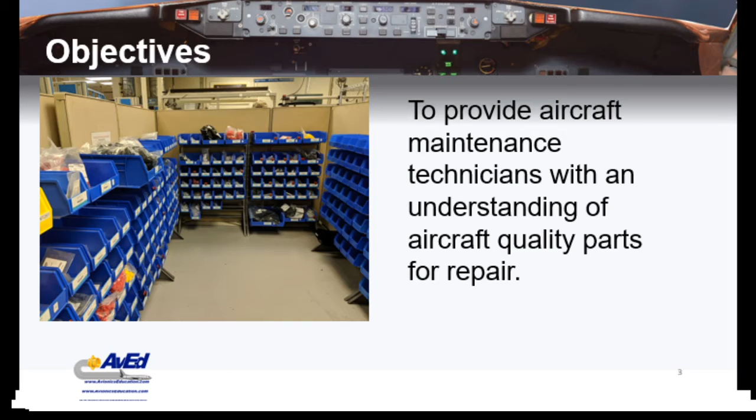So our objective for this presentation is to provide maintenance technicians with an understanding of what an aircraft quality part is to be used for repair. We're going to talk about some guidance that the FAA has put out to determine that, and more importantly, we're going to discuss the rules that understand it.

So first thing I'm going to do is that Part 43 is our maintenance rules. This is how we perform maintenance as technicians, whether you're a certificated repairman, an A&P mechanic, or somebody working under the supervision of a maintenance provider - could be a repair station, could be an airline.

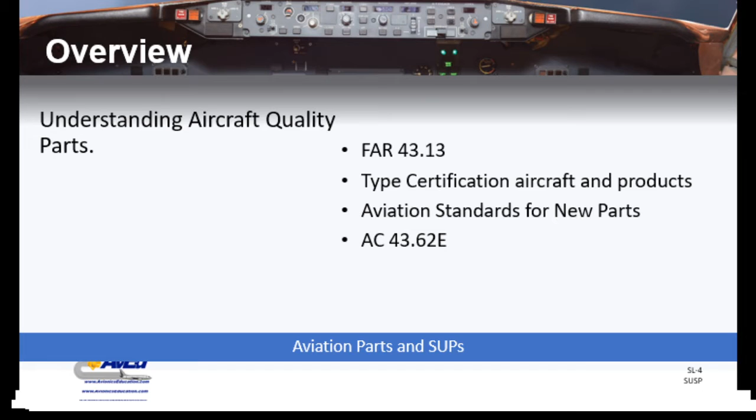We all have to comply with 43.13. We'll talk about that. I want to identify the difference between a non-type certificated aircraft product and those that are, so that we have a complete understanding of what we're hanging these parts onto. And then we'll get into what the FAA wants you as a technician to understand when installing a part on an aircraft. So we're going to talk about the guidance the FAA has put out, and the latest version is Advisory Circular 43-62 Echo. So let's hit right into it.

I'm going to go right to FAR 43. Here are the rules. Performance rules, general, little a. There's a lot here, but the first thing is: each person performing maintenance on an aircraft engine, propeller, or appliance shall use the methods, techniques, and practices, and more importantly, that person shall use the tools, equipment, and test apparatus necessary to assure completion of the work in accordance with accepted industry practices.

And then we get back to special equipment. Remember this phrase later on in the presentation, because we're going to come back to test apparatus necessary to complete the work - in other words, to determine the airworthiness of the product to be installed on the aircraft.

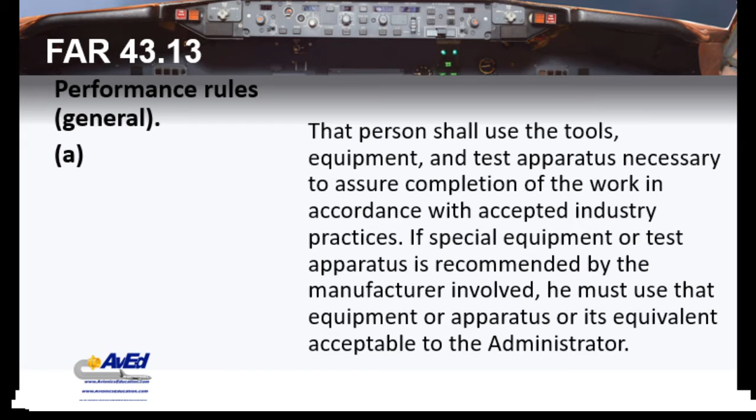Little b, again, talking about each person maintaining or altering an aviation product shall use - there's that word, if you've taken my FAR regulations course, words matter. Shall means imperative, you have to do it. Shall do that work in such a manner and use materials of such a quality that the condition of the airframe, aircraft, engine, propeller, or appliance worked on will be at least equal to its original or properly altered condition.

And it goes through all what they mean by properly altered condition. What this means in a nutshell is we must follow the information provided to us technicians on how to install a component and determine airworthiness. And these will all be based on the instructions for continuing airworthiness the manufacturer is going to provide for us when we perform maintenance on a type certificated product.

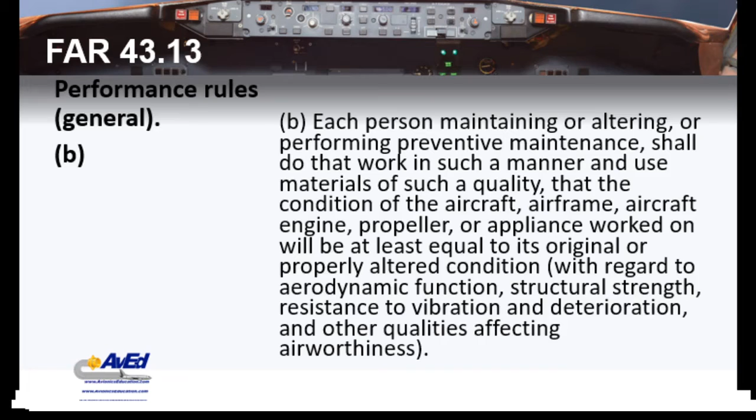Again, there's that word again. I want to emphasize little b: use materials of such quality. So how do we identify that? Meaning that we must use an approved part.

So an approved part is defined as something that's been properly designed, meaning that in the world of type certification products, our aircraft, that means Part 21; properly produced, which means manufactured, again under Part 21; then properly maintained, which means for us in maintenance, are we maintaining the product? Are we protecting it? Are we installing it correctly? And last and foremost, everything about anything we do in aviation, we must have documentation.

We have an old saying in the FAA: if it isn't written down, it never happened. And that is documentation. If you've seen one of my videos before on Ask an FAA Question, or on YouTube on the Avionics education channel, I did talk about serviceable tags and return to service documents. So that'd be a good one to go to if you need more information on what documentation is.

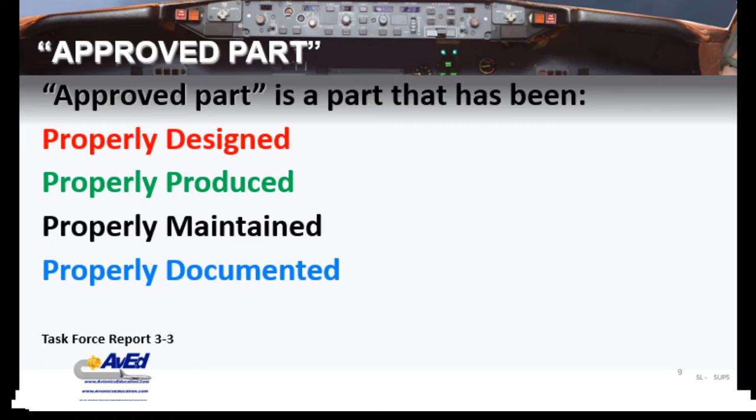But what could happen if everything breaks down? I'd like to discuss real briefly here some examples of where an aviation part did not meet any of the 4 criteria.

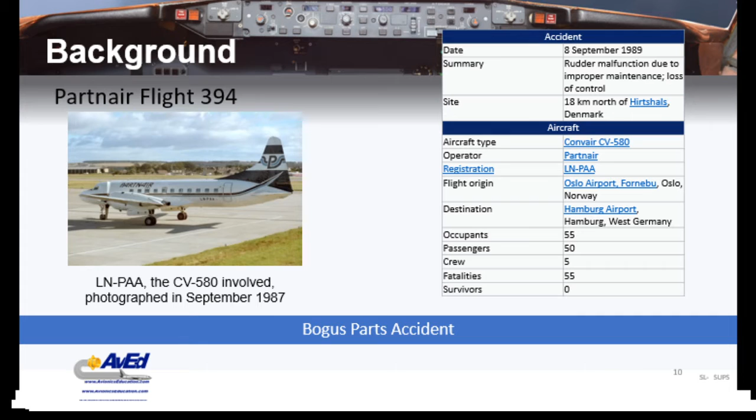And this was really the beginning, going back to - I believe it was, I'll pull it up here - 1989, where the Partnair aircraft, a Convair 580, which was the turboprop version, experienced a complete failure. In other words, we had an in-flight breakup of the aircraft.

The investigation showed, and here's the problem, there was no flight data recorder for it, that at the area of the breakup there was evidence of aerodynamic flutter, which you could see in the aluminum skin, that the skin will overheat. Think about a hanger, remember the old-fashioned hangers, if you bend it back and forth numerous times it'll eventually fracture. Well, that's because it increases its heat internally.

They also found that the APU mount had broken, which aggravated the vibrations. And they also found that the rudder shroud doors were missing before the breakup, meaning that these shroud doors that cover where the bolts are that mount the rudder into position were missing before the aircraft broke apart. There was a flight data recording earlier which did show indication that the aircraft was experiencing vibrations, possibly due to flutter at the time.

And then looking back at maintenance records - when I investigate aircraft accidents, I look and see who worked on the aircraft - the record showed that a mechanic did change all 4 of the vertical rudder bolts. For me, as an aircraft mechanic, that is what I would call unusual. It's not something you change all the time. So I would definitely be looking at that as an investigator.

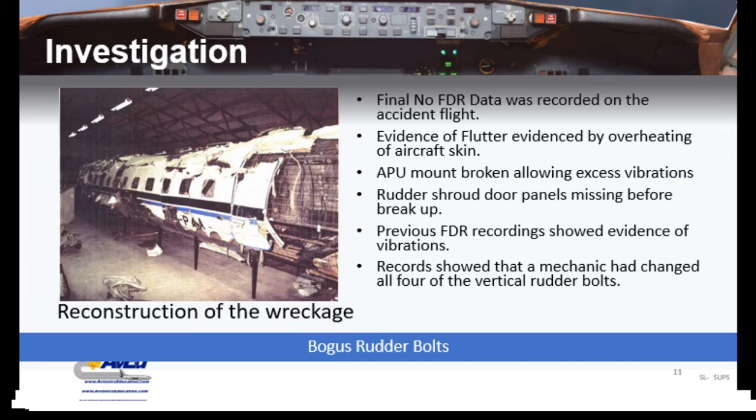Well, what did they find out? It was discovered through the investigation that the 4 bolts and the sleeves used to hold the rudder into position on the aircraft were counterfeited, meaning that they weren't treated, therefore would not remain torqued - which means they were too soft. And what aggravated the situation is you had the APU mount that was broken, which allowed vibration in the back of the aircraft to set up these harmonics.

So no one incident caused an accident, right? Now remember your accident investigation course when it talked about links in a chain.

So what did this lead to? We had an indication where we had a bogus part, an illegal part, or an unairworthy part introduced into the system. So the FAA went through and did an audit of aircraft manufacturers, airlines, certificated repair stations in the U.S.

Department of Transportation found that 39% of the parts on the shelf were found to be either counterfeit or otherwise what we define now as an unapproved part or a suspected unapproved part, meaning they didn't meet the 4 criteria: properly maintained, properly manufactured, properly designed, or more importantly, did it have its documentation? If you can't prove the documentation, the part was not done.

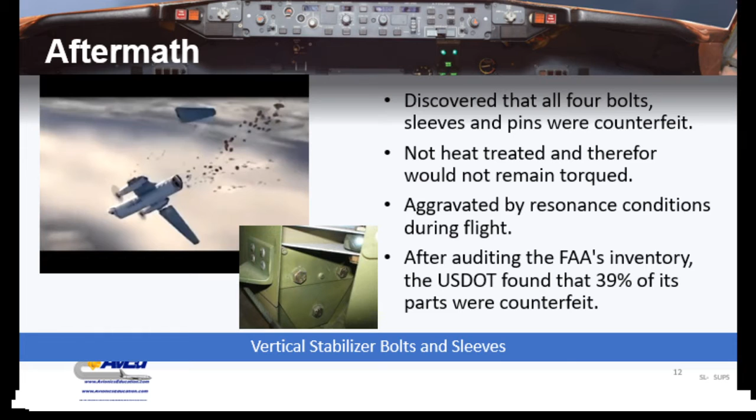Moving on. So moving forward today, and we're going back to 2010 right now, we'll talk about this in the SUPS course. I do have a SUPS course, a 2-hour version of this course that talks about suspected unapproved parts. But since 2010, there was an investigation by the NTSB looking at aviation parts that played a role in aircraft accidents, going back to 2010.

There were 24 cases that could be shown where an aircraft did have an unapproved part installed that was a factor leading to the accident. This is difficult to find, especially even today with accidents being really low, but also because a lot of the parts that fail in flight will disappear into the accident.

Now the FAA has recorded, just in the past 5 years, 135 unapproved parts discovered in passenger jets. If you pull up the most recent one, there was a whistleblower from China that tagged parts installed on Boeing 737 slat actuators that were definitely unapproved parts and posed a hazard to aviation and had to be removed from the system. So it's still happening today.

Why? Because aviation parts, to meet those 4 criteria I talked about before, necessarily makes them really expensive because of control, design, record keeping—all that goes with proving an aviation part means it costs money for technicians and manufacturers and aircraft manufacturers to track these parts.

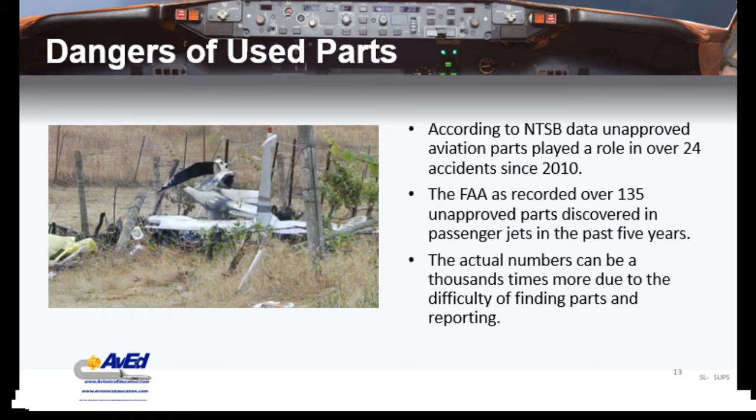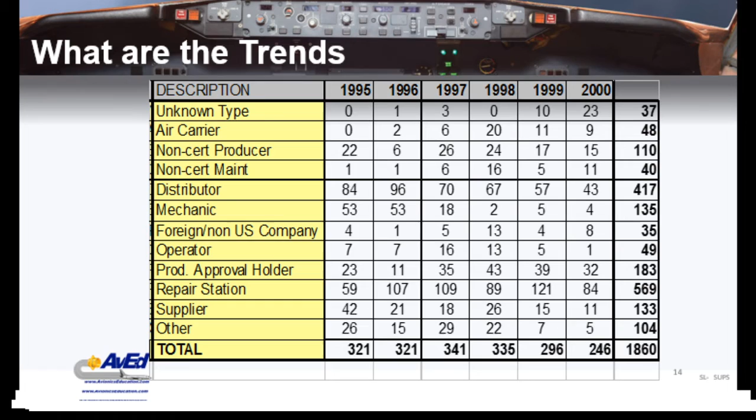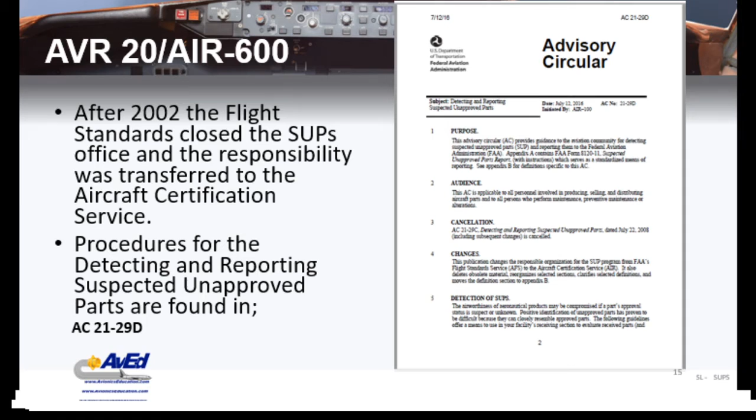So what does that really mean, Bruce? Well, it should have not gone to AIR 600. In my mind, in my opinion, just my opinion, because I'm not in the FAA, I can have an opinion, the AVR 20 should go back to flight standards because that is the people who are most likely to catch these parts being installed on an aircraft. And we'll talk about that in another section.

Okay, so since the AVR office, the Flight Standard Office, was closed, there has been a significant drop in the number of reports of SUPs, Suspected Unapproved Parts. Remember, when I was in the FAA, when the program was under flight standards, an example for me is I would actually get a notification through email, or other ways, to the FAA inspector, and I'd be notified through the SUPS process to go investigate an unapproved part for one of my operators, one of my air carriers that I was assigned principal for. We'd go look and see if these parts were in inventory and pull them out. We found, for one operator, generator shear shafts that connect the generators to the CSDs were bogus.

Another source of unapproved reporting to me was directly from an operator. I had an avionics operator who called me up - they were doing a repair, opened it up, and noticed the maintenance had been done out of country with a significant change to the battery system of an inertial reference unit, IRU. It turned out we had to do an investigation because this outside-the-US maintenance repair organization was not using approved data or approved processes. So it became very good then.

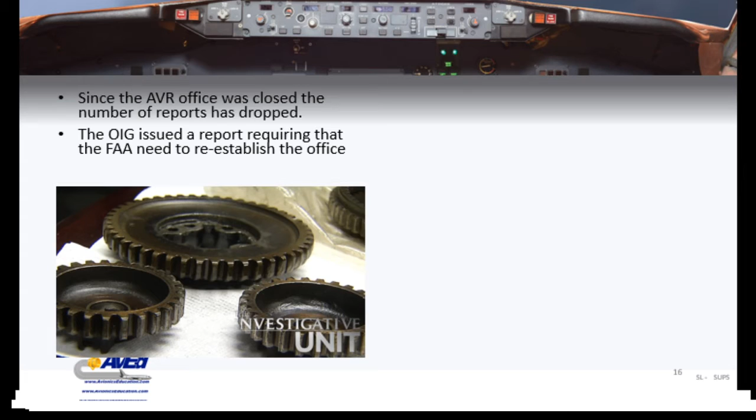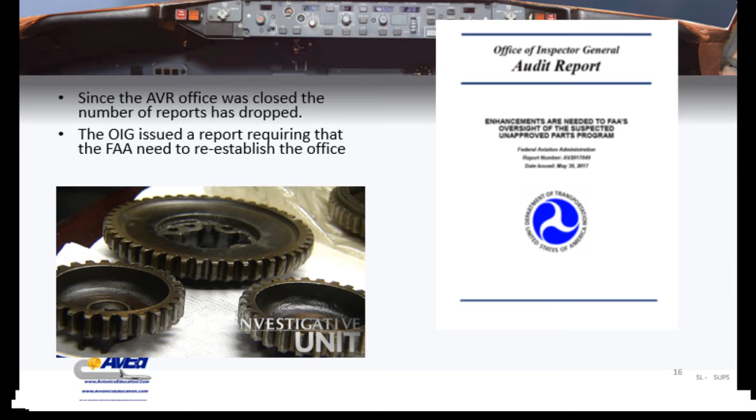Now, what happened since? Well, the OIG, the Office of Inspector General for the DOT, did issue an audit report. I'm going to put this on the link in the description page of this video later on when I redo the video. They were really critical of the FAA as a whole for not having an established system for reporting, or giving mechanics, technicians, and airlines an avenue to report SUPs. We'll talk about that later.

So then what? What are we supposed to do? Well, we're supposed to, as technicians, still operate, working on aircraft or maintaining aircraft in accordance with Part 43. So it's still our responsibility to determine that the parts we're using in the aircraft are appropriate and safe. Okay, two issues here: is it appropriate, and is it safe? The FAA did issue guidance to help us do that.

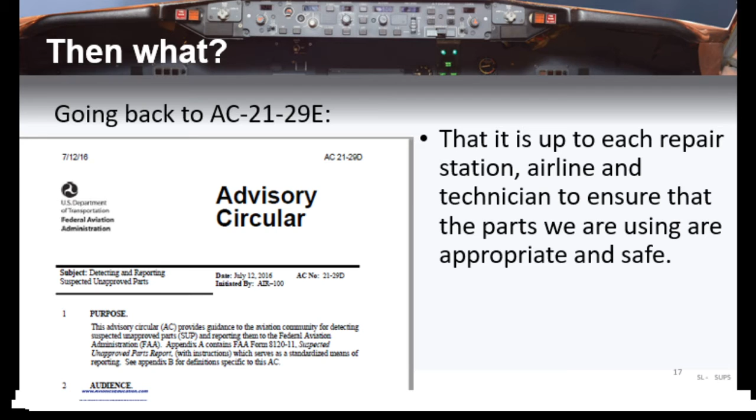We're going to talk about detecting and reporting suspected unapproved parts. But I also have another one that talks about identification of aircraft parts. So there are orders there. Right now, this order, if you go to the AC, will tell you to go to the hotline and file a complaint on the form. And so I'm confident that the FAA will step up and make improvements.

So let's talk about 43.1, applicability. This is getting back to that properly maintained element of a part. Just paraphrasing here real quick: except as provided in paragraphs B and D of this section - remember, these FARs always have exceptions, and these exceptions will cover other operators that have their own set of rules - this part describes rules governing the maintenance, preventive maintenance, rebuilding, and alteration of any of three things: aircraft having a U.S. airworthiness certificate, some foreign registered aircraft, and we'll talk about that in a second, or any airframe, aircraft engine, propeller, appliance, and component of such aircraft. So everything that meets an airworthiness standard has to be maintained in accordance with Part 43.1.

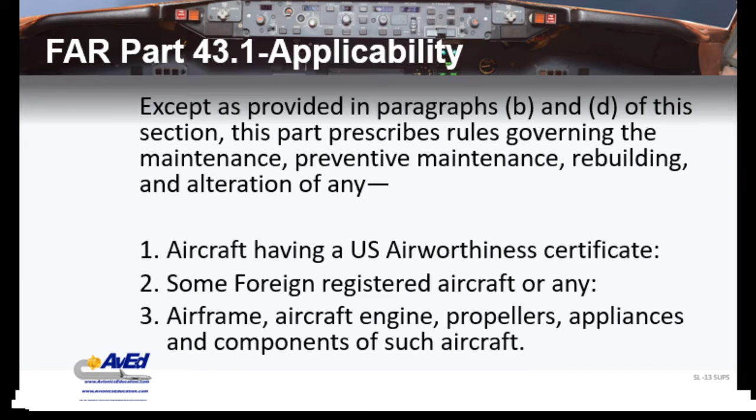So what does that mean? Well, let's talk about the first one. Aircraft operated in the United States under a TC type certification are issued at their inception a standard airworthiness certificate. Under the conditions of the certificate, unless sooner revoked or suspended, the aircraft must be maintained in an airworthy condition for the certificate to be valid.

So what's an airworthy condition? We always have to talk about that. The FAA has actually updated its definition, but it's both a verb and a noun in some sense. It's a condition of being and something that can be described.

First and foremost, it is something that meets its type design. In other words, everything on it the day it was born, when the aircraft was hauled out of the factory and issued the airworthiness certificate.

And then there's words, remember, my FAR class says, or in properly altered condition. What they mean by properly altered is that not every aircraft is going to be perfectly replicated throughout its entire life as the day it was issued its airworthiness certificate. It is modified over time, improved over time. These improvements or modifications must be properly done.

We're talking about STCs, ADs, airworthiness directives, supplemental type certifications, or other types of modification of the aircraft over the years. Did you know properly altered condition could also mean compliance with an MEL, minimum equipment list requirement?

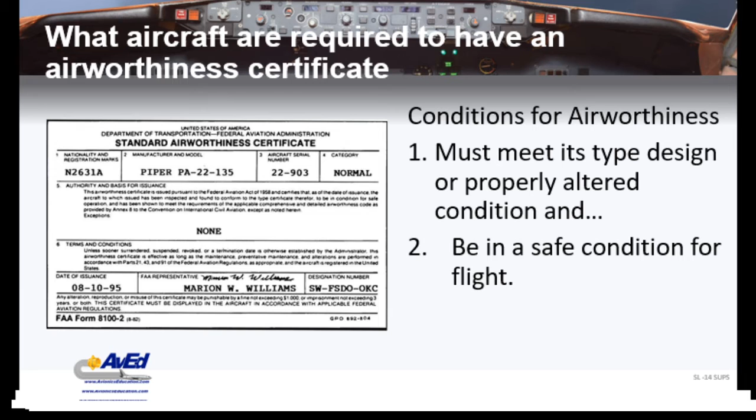The safe means, well, if I'm flying in daylight, in clear weather, then it's safe for me to have a landing light out. However, if the conditions of the weather are bad, or I'm at night in certain conditions, then even though the MEL says I can deactivate the equipment, it may not be safe for me to do so. That's what they mean by conditions for safe flight.

So let's talk about type design then. The conditions that an aircraft was issued its airworthiness certificate, under Subpart B in Part 21 - FAR Part 21 is manufacturing, issued by the FAA for type certification - are included as part of the type design.

We have all this information and records. I've got operating limitations for the aircraft, type certificate data sheet for the aircraft. It talks about all the parts and capabilities of the aircraft. Applicable regulations of the subchapter, which the FAA requires - we read that carefully - the applicable regulations of the subchapter with which the FAA records compliance.

What we're talking about there is that if I have an aircraft manufactured under Part 21, there's a different subchapter for a Part 23 general aviation aircraft versus a Part 25 air carrier aircraft. That's what they mean. And there's the old caveat: any other conditions or limitations prescribed for the product in this subchapter.

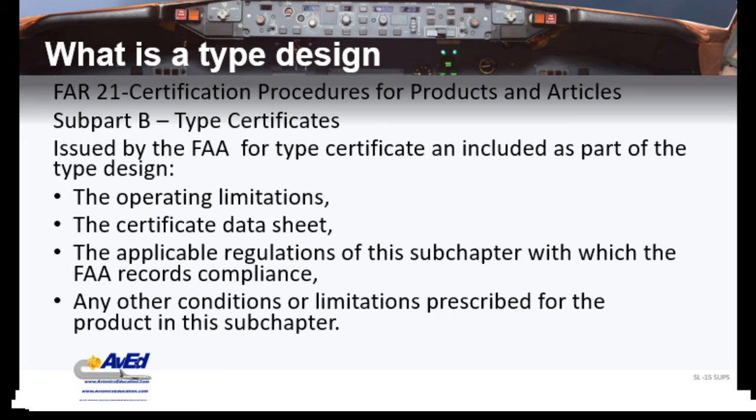So we're not going to get too much into that, but we're just talking about type certificates. What do they not include? Obviously, military aircraft. Military aircraft are made under their own military standards. Are they more or less strict than civil aviation? I would have to say no.

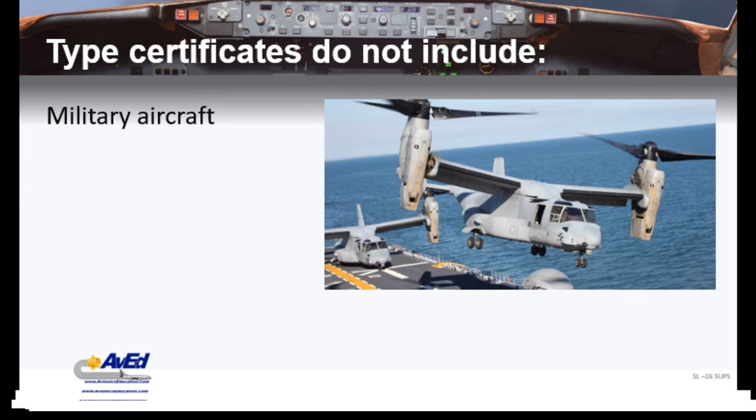But it's just another standard, another method of validation that we have to understand. I can't take a civil aviation part and mix it with a military aircraft unless the military specifications or maintenance structure says I can do so specifically.

Experimental aircraft - there's a bunch of different types of experimental aircraft out there. Amateur home built: I don't maintain that to Part 43. It doesn't apply to an amateur because it's not type certificated. Special use experimental aircraft show compliance; the manufacturers, under the conditions of the certificate, determine the safety of the operation.

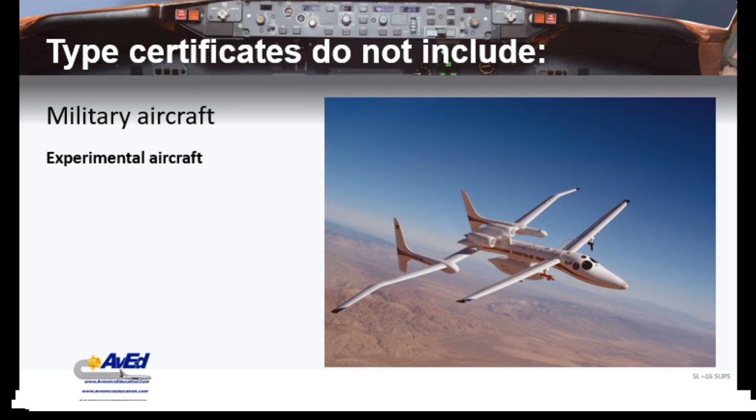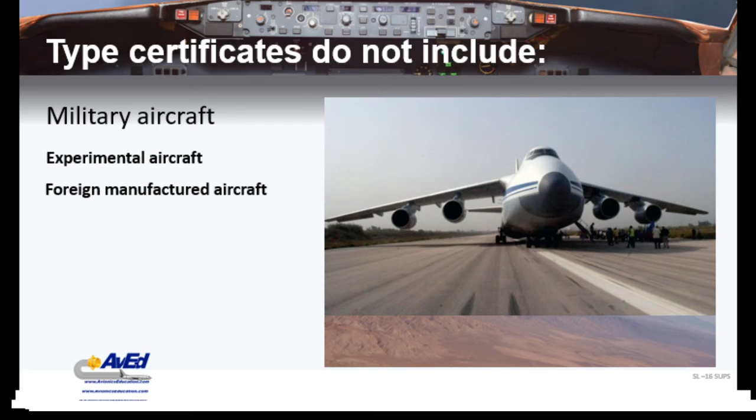And foreign manufactured aircraft - we operate in the United States. We allow a lot of aircraft that come into the United States that are foreign manufactured, meaning they're not U.S. N-registered, operating under an air carrier certificate. We don't maintain them in Part 43. They have their own standards.

So, aircraft with airworthiness certificates - just by name, Boeings, McDonnell Douglas, Bombardiers have airworthiness certificates. Cessna, Piper, any aircraft that is type certificated has that white certificate. And if anybody gets on an airplane and is standing by the door waiting to get on - which is not happening - but when you walk in, you should see the airworthiness certificate somewhere posted around the entrance to the door.

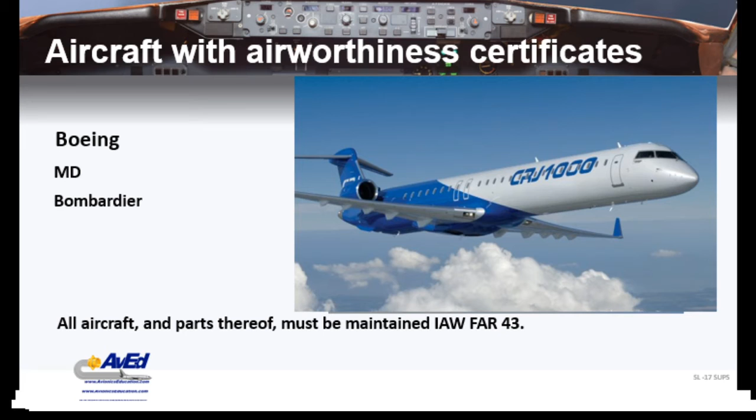Not only the aircraft manufacturer, but everything that goes on those aircraft must be maintained in accordance with Part 43.

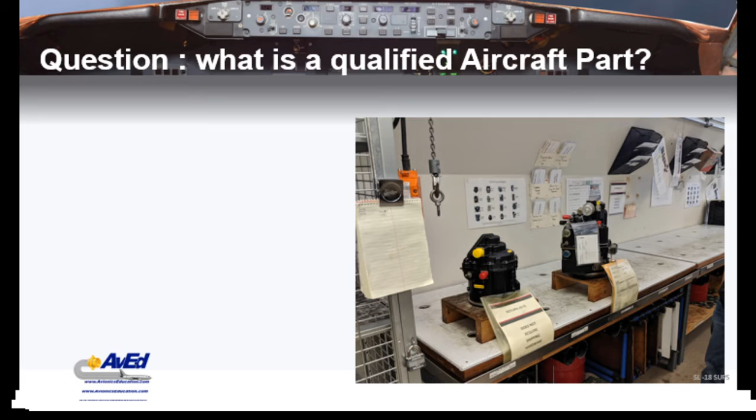So let's talk about the next part of the situation. What is a qualified aircraft part? Well, the answer is one that meets an FAA parts approval process.

That has a lot of definitions in aviation because there's a few different people that can produce parts for an aircraft. For example, a manufacturer can produce their parts for their own aircraft. So design approvals for anything, and we talk about aircraft products, by the way.

We'll get into this definition. A product is the aircraft itself, an aircraft engine, or a propeller. These are aircraft products.

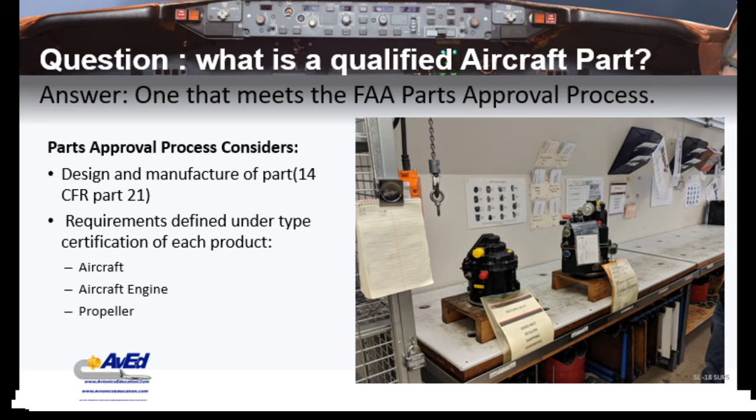A part is eligible for installation in a type certificated product because we get back into, is it approved design? Has it been produced properly? And does it come with proper documentation? This is for new parts, not repaired parts, so we're all complying with Part 21 here.

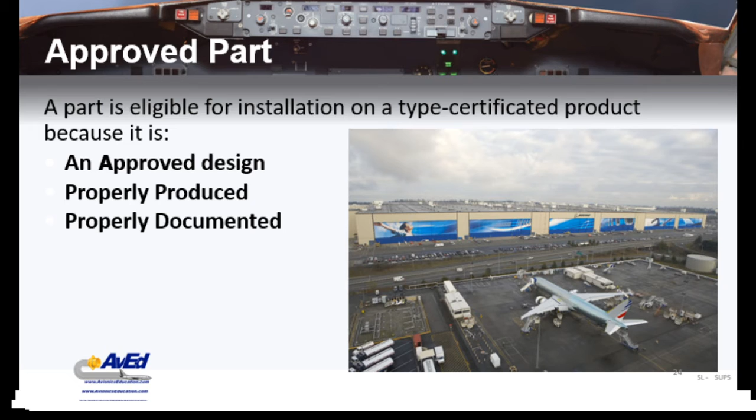Part of that approved design, these are things that have to be produced to it being an approved design, which means I need to have drawings, specifications, showing the configuration, and that means it may show the different approval levels or approval for what installation the part can be installed on. Must include detailed and written test procedures and the desired results.

In other words, if I have a test function for a pressure valve example, it wants to give the limitations. It must apply limitations to the technician certifying the part. At what point the valve opens? At what point does the valve close? That's what we're talking about, desired results.

And the last is, it must define the airworthiness limitations included in a list of next higher assemblies for an aircraft for which the part is designed. So that must be all part of the approved design.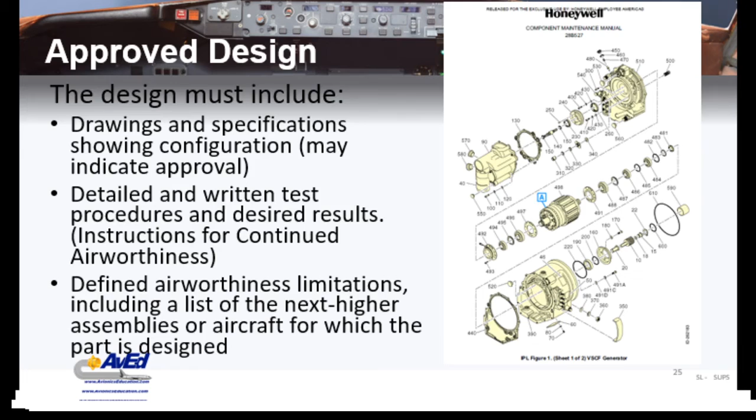The documents themselves, again, if it's manufactured by an aircraft, their document is going to be the type certificate sheet itself. I can approve aircraft parts based on an STC, which stands for Supplemental Type Certificate.

In other words, I want to make a widget for a Piper, for example. Then I can apply as an STC applicant, make the widget for the Piper, and then if I meet certain criteria, which is all the Part 21 criteria except for that one individual part on that one aircraft, the FAA will issue me an STC.

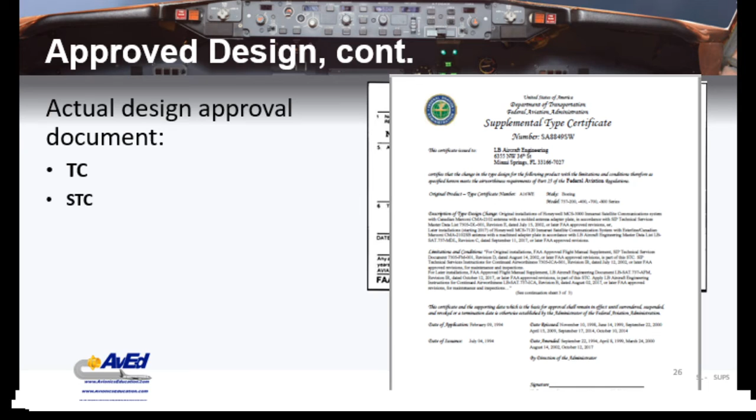Now, great, I can install it, but remember, there's something that has to go with it. If I want to sell the part, then I have to have a PMA, which stands for Parts Manufacturer Approval. So if I have an STC part and I want to manufacture it for sale, either on behalf of the TC holder or an STC holder, I must have a PMA approval to manufacture that part from the FAA. And Part 21 goes with all of that.

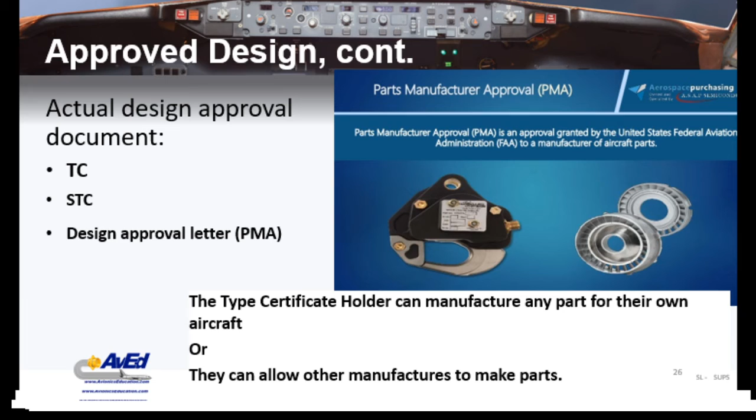So, a type certificate holder can manufacture any part for their own aircraft, or they can allow other manufacturers to make those parts, provided that they have a PMA letter from the FAA saying they can do that.

So, how do we determine what parts can go on an aircraft? We're looking for an approved parts list. And this comes, again, in many various forms.

For general aviation, when I went to A&P school, or when I taught in A&P school, the one that we went into the most was the Type Certificated Data Sheet, the TC Data Sheet. The TC Data Sheet provides information about the dimensions, what engines can be installed, what autopilots can be installed, the motion of the flight controls. It gives all the vital data for that aircraft to identify that as that aircraft.

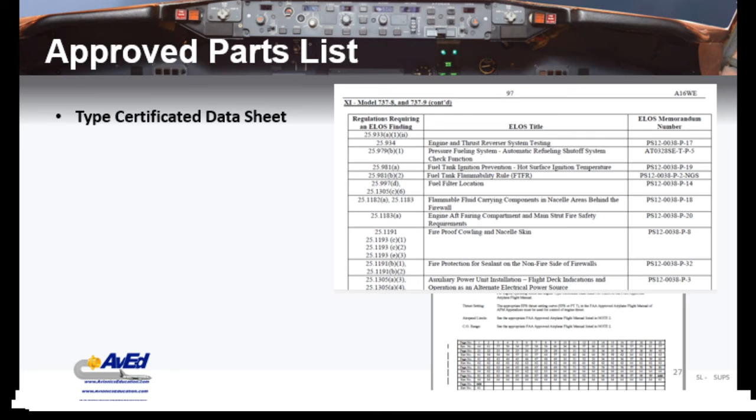There's an example here showing some of the equipment that could be installed by make, model, series, part number. Another item that will actually help a technician determine if a part is legal is the aircraft's approved equipment list. Now, if it's not shown on the type certificated data sheet, the aircraft approved equipment list will show what is in the aircraft now and possibly what is an option.

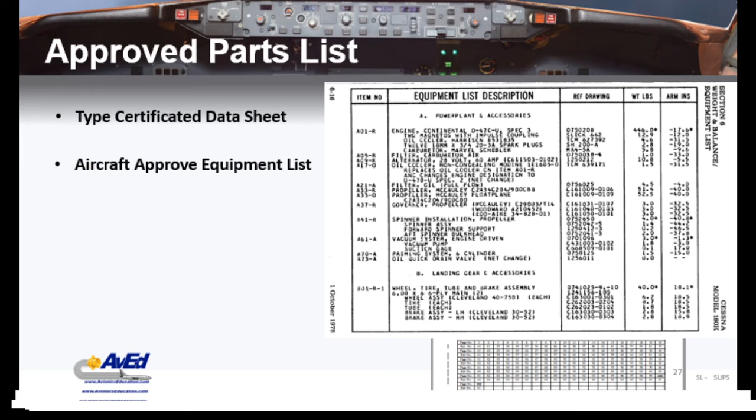And the type certificate data sheet could show an autopilot make and model, but maybe at a later date that autopilot was modified to a newer unit, which means the installer had to add to the aircraft's approved equipment list the new autopilot being installed, because it was installed using proper parts with proper data, using proper tools and equipment to install and test it.

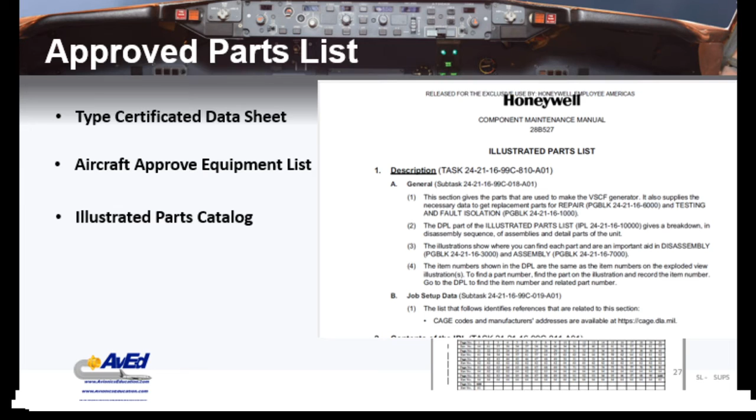If you have an illustrated parts catalog, an IPC, that will also show you what parts are eligible to be installed by component. IPCs themselves are not part of instructions for continued airworthiness, they're not maintenance instructions, but a lot of technicians use them as a tool that shows the orientation of certain parts as you install them. You certainly could use it to order parts from an approved vendor.

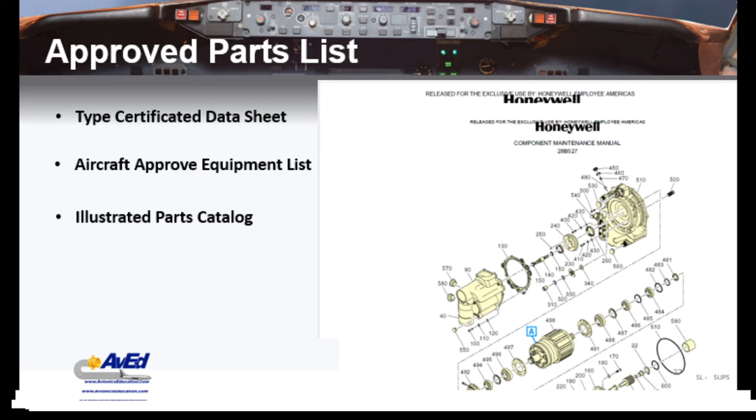Here's another example of a component maintenance manual, and it shows the part number and its various installations, and the figure numbers of where these parts are located.

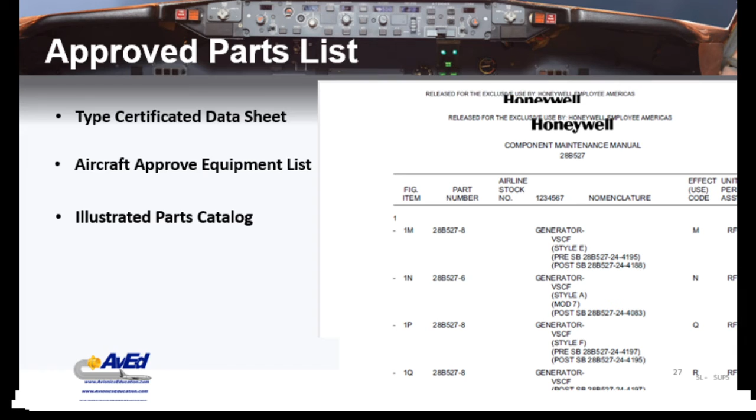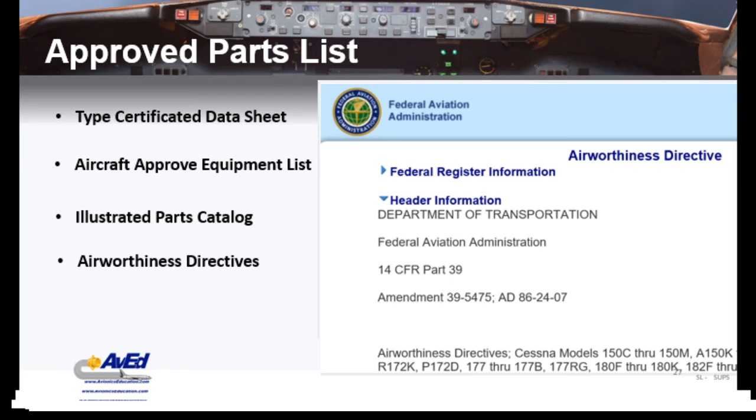Another source of approved data is the FAA issuing an airworthiness directive. Airworthiness directives may require a change, addition, or modification to a part involving aircraft parts. Even before the manufacturer has a chance to update the type certificate data sheet, the aircraft's approved list, the TC list, a mechanic can use an airworthiness directive as approved data to validate parts installed in an aircraft.

Service bulletins work the same way. A manufacturer can issue a service bulletin that will also be used as an approved parts list.

So let's talk about determining the eligibility of a part.

Aircraft parts - before anybody can return an aircraft to service, those parts and materials used to return an aircraft to service after repair, maintenance, or otherwise servicing must conform to the certification standards of the product being altered or repaired. We're talking about a type certificated product: airframe, power plant, propeller, or any part thereof.

Now, the FAA has an advisory circular that helps us all identify what these parts are. That is Advisory Circular 20-62, echo being the most recent version as of this date, titled Eligibility, Quality, and Identification of Aeronautical Replacement Parts.

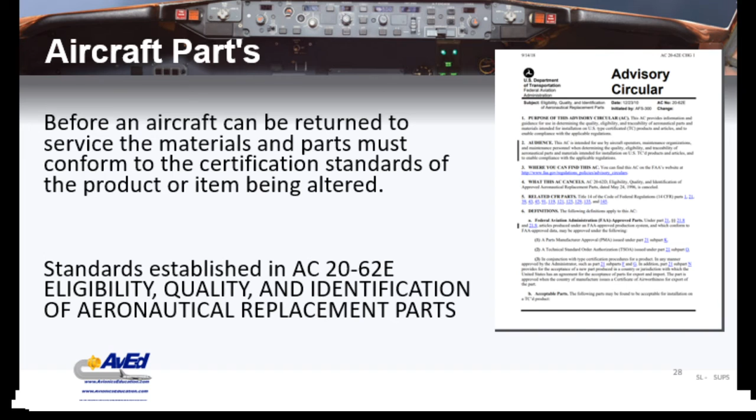Every advisory circular, which everybody in aviation should be familiar with, has a paragraph in the first section that tells you exactly what it's for. Under purpose, this advisory circular provides information and guidance for use in determining the quality, eligibility, and traceability of aeronautical parts and materials intended for installation on U.S. type certificated products, and to enable compliance with applicable regulations. One word I want to highlight here is traceability. Traceability is only done through documentation, and we'll talk about that in a second.

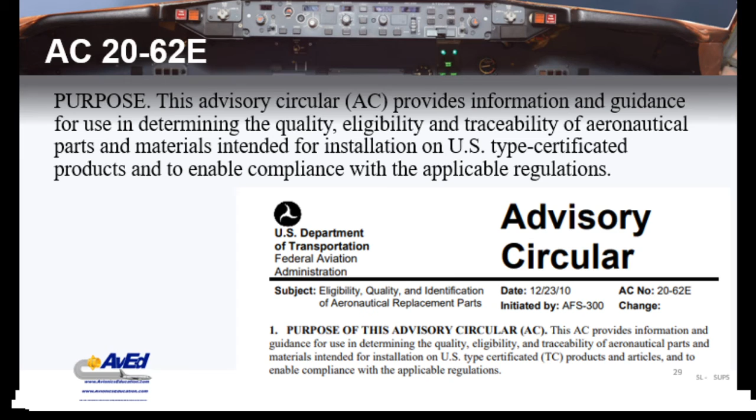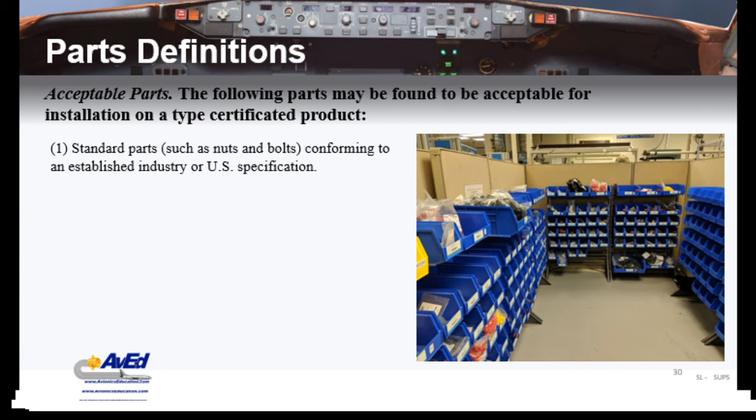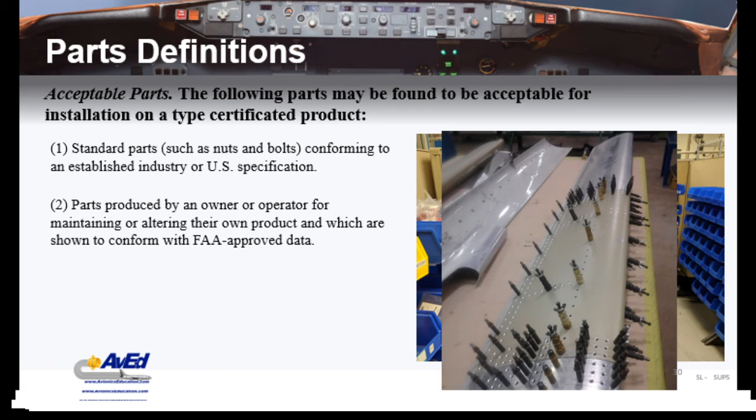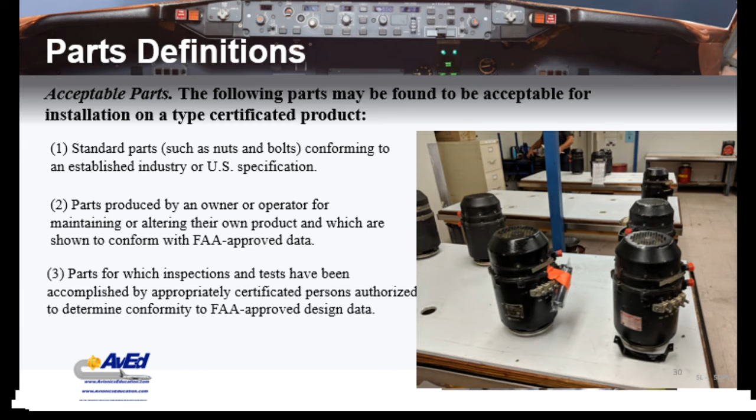So what is an acceptable part? Under the definition, an acceptable part can be a standard part - nuts, bolts, rivets, anything established by U.S. industry - a part produced by an owner or operator for maintaining or altering their own product, shown to conform with FAA-approved data, and parts for which inspections and tests have been accomplished by appropriately certificated persons authorized to determine conformity to FAA-approved design data. We'll talk about each of these subjects separately.

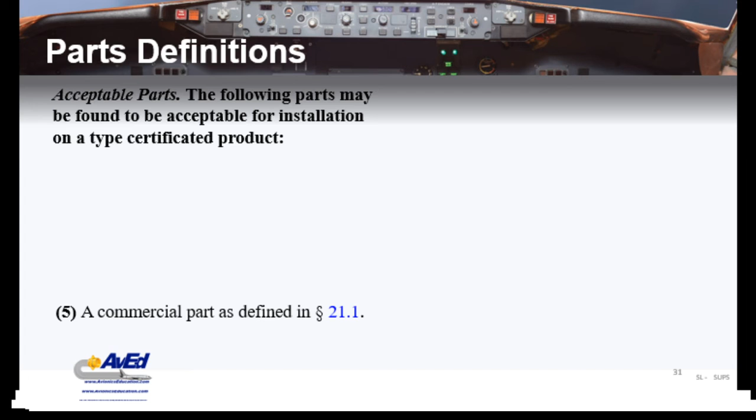Another thing we'll talk about is a commercial part, and we'll cover that real quick in a second. But next, we need to talk about acceptable parts - the following parts may be found acceptable for installation in a type certificated product.

Parts fabricated by an appropriately certificated holder with a quality system, and consumed in the repair or alteration of a product or article in accordance with Part 43. What are we talking about here? Part 43, maintaining, means that I can manufacture a part provided I'm either an airline, a repair station, or somebody who holds PMA. I have to be careful here because a manufacturer cannot repair.

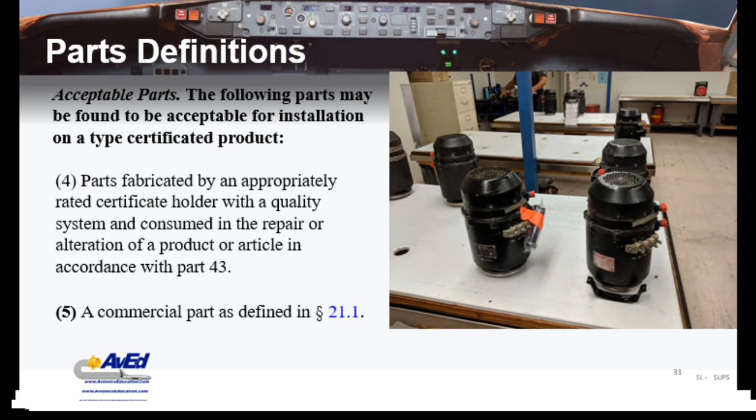A manufacturer who holds PMA cannot overhaul a part - we'll talk about that in a second. There's a distinction there when we talk about these words. What that means is these people can manufacture as long as I have the data, the tools and equipment, and the trained, qualified personnel to do the work.

Again, an article I wanted to talk about before, the definition. If a product is an aircraft engine or propeller, then an article is everything else. It means a material part, component, process, or appliance. There's that commercial part identified, an article that's listed on an FAA-approved commercial parts list included in the design approval holder's instructions for continued airworthiness, in accordance with 21.50. Remember we talked about Part 21 and subchapters. This is one where it talks about manufacturers having to comply with the subchapters of their type of products, whether it's general aviation, small aircraft, large aircraft, etc.

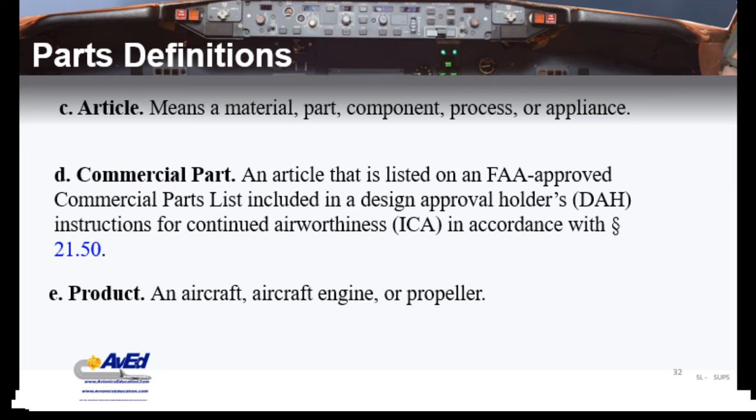So let's get back to what parts are. What is a standard part? Well, that is a recognized aviation part that meets a known specification and can be traced back to its manufacturer of origin, which means it gets back to documentation. A good one is AN, which stands for Air Force Navy bolts, or MS, military standard bolts and hardware. If you're an A&P mechanic or work for a distributor, these parts are specifically marked to identify them as meeting that criteria. But that is a standard part: nuts, bolts, cotter keys, cotter pins, rivets, the standard things.

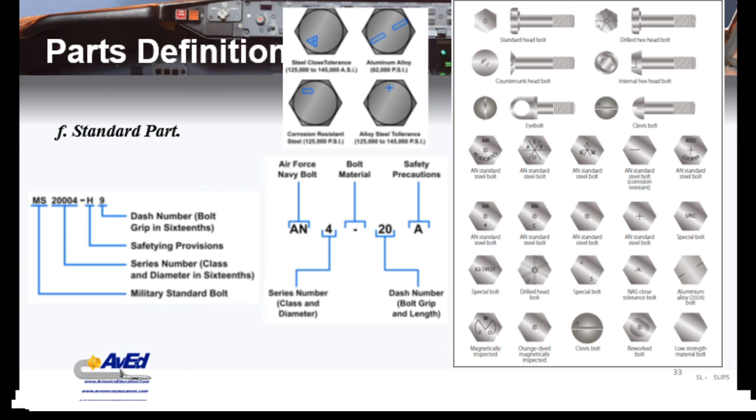What is a new part? That is a product, accessory, part, or material that has no operating times or cycles. Now, there are situations, particularly in the manufacturing process, when a part may have cycles or times recorded on them, and sometimes they don't. For example, when an aircraft goes through manufacturing, there's a certain period of time where it's gone through testing and proving flights. Well, these are part of the manufacturing process and not included in the lifetime of an aviation part.

So aircraft parts, particularly life-limited parts, don't start accruing time until after the date that the airworthiness certificate is issued. Even though they may have a number of cycles on it, they don't count, and that's part of the manufacturing process. Manufacturers build that into the manufacturing process. Notice that they're going to be doing test flights. For our example, we used to have down here in southern Arizona, aircraft were manufactured and built up in Wichita, and were literally flown here for completion as part of the manufacturing process.

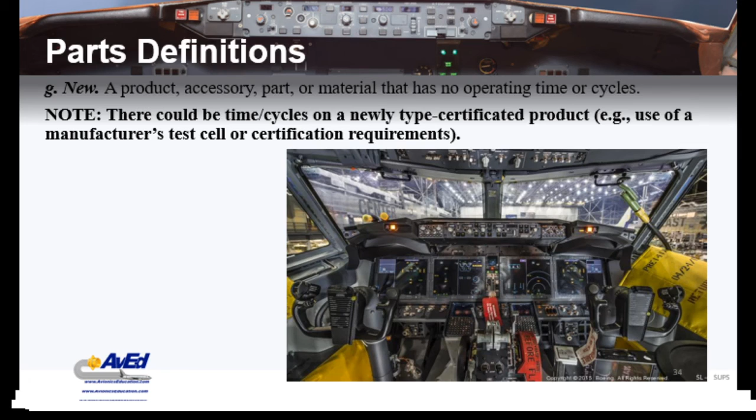Overhaul, there we go, define an overhaul. If I define a part as overhauled, it means airframe, aircraft engine, propeller, everything else, using techniques and practices acceptable to the administrator, which has undergone the following. Now, keyword, acceptable to the administrator, what are they looking for?

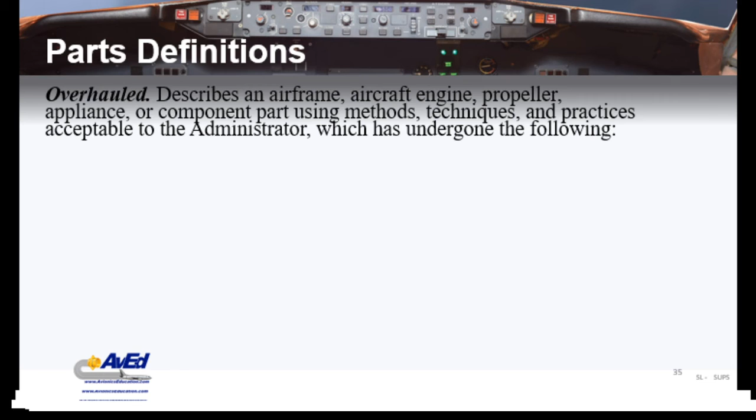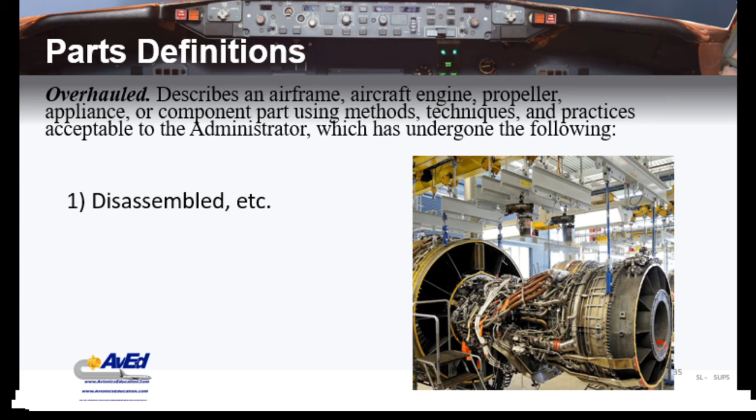They're looking for approved processes, using approved tools and equipment, using acceptable parts and materials. And they must have undergone, completely be disassembled, not torn down to where you have to remove rivets, but disassembled as much as possible, inspected, and reassembled. And this brings it back to like-new tolerances. They must be tested in accordance to new tolerances, as if it was new, and been returned to service using documentation.

Can an overhauled part ever be described as new? No. But it can have new life limits reset to zero on it under overhaul.

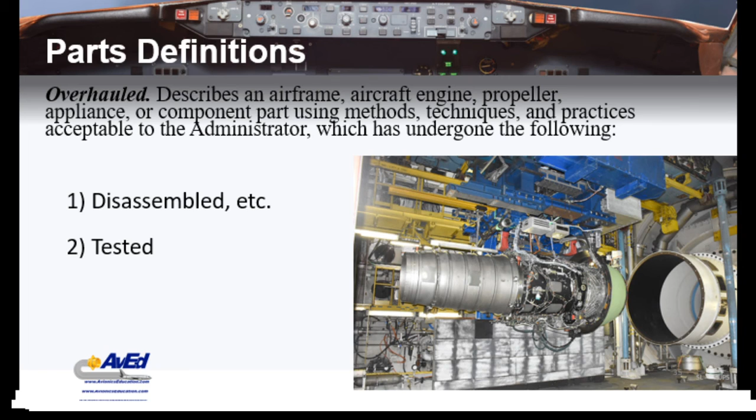And this is something that a manufacturer is allowed to do to their product. They can rebuild. However, they can't do anything else unless they have a repair station certificate.

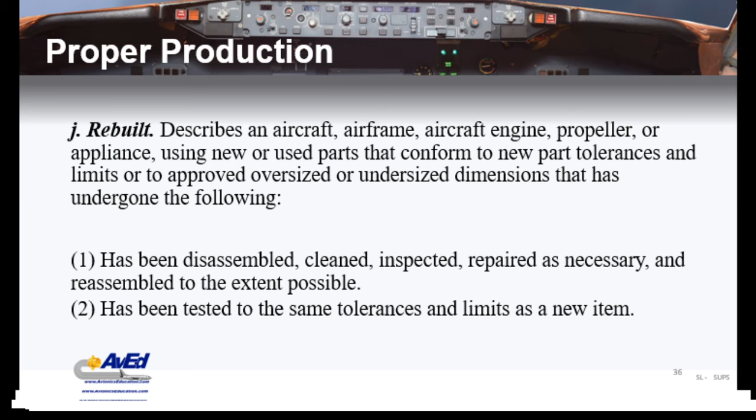And then we get back to records. What records must be included with all these parts? Well, a person approving or disapproving a return to service of a type-certificated product must ensure that the required maintenance record entries comply with 14 CFR Part 43, and it must include the following information.

What was done to it? A type of inspection, if it was an inspection. A brief description, which could be 'changed tire' or 'changed tire in accordance with maintenance manual.' The extent of either the inspection or maintenance. The date that it was completed. If the aircraft or product has production hours, cycles, or life limits, that must be recorded as part of the return to service.

Then it must have the signature, certificate number, and kind of certificate held by the person doing the actual approving or disapproving for a return to service. And it must state the appropriate certifying statement that the product or part thereof is approved or disapproved for return to service as applicable. So we're looking for traceability back to this process if the part was returned to service, not new.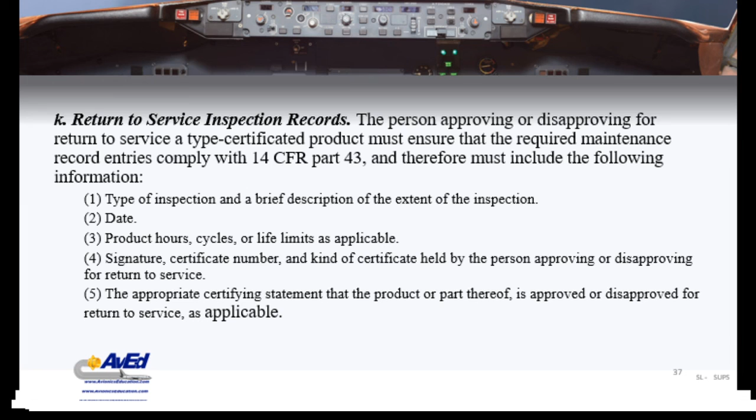So let's finish up here. The approval for return to service is the responsibility of the person who performs the maintenance and who signs the record for approval for return to service. Now, real quick side note here. Anybody could work under the supervision of a certificated individual and be non-certificated. But when we look at 43.9, return to service after maintenance, and not 43.11 — 43.11 is an inspection. Only a certificated individual can perform inspections, but maintenance can be done by uncertificated people under supervision. But remember, the name of that person producing that uncertificated maintenance must be included in the record.

Okay, the owner-operator ultimately is responsible for the continued airworthiness of the aircraft. Could be the airline, could be the registered owner. So they're the ones required to understand the airworthiness definition for the aircraft. We have to ensure that anything we perform and put on aircraft ensures continued safety in civil aviation, which means it is essential that appropriate data be used when inspecting, testing, and determining the acceptability of all parts and material that we use for repair or manufacture. Which gives us back to our next point: particular caution should be exercised when the origin of the parts, materials, and appliances cannot be established, or when their origin is in doubt.

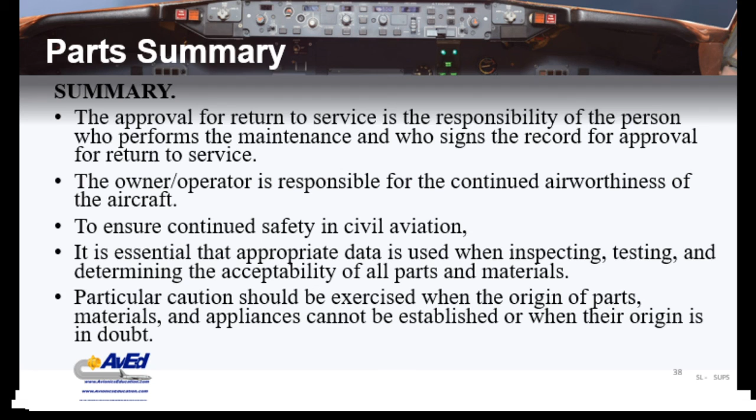So, let me go to another slide here. So that ends the show, or this presentation today.